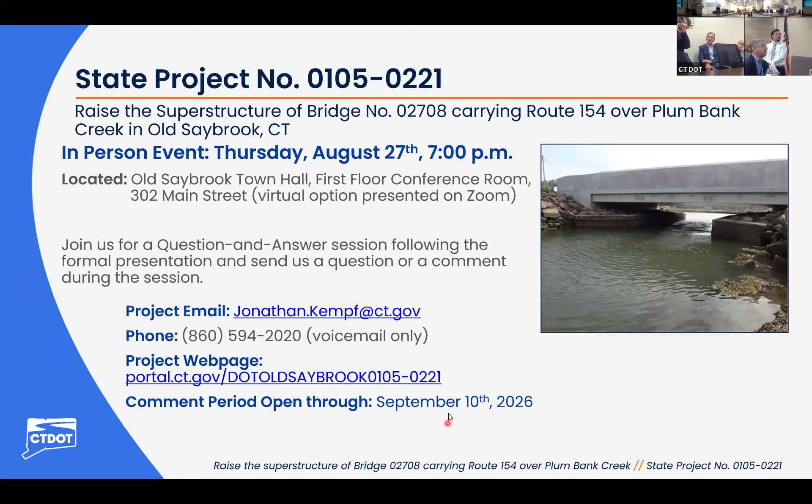I'll give a brief agenda. We have about a 15-20 minute presentation we'll go through. First I'll introduce the project team, then we'll go through our presentation of the bridge, an overview of the site, the project background, the purpose and need, why we're back out here so soon. We'll go to the proposed design and construction, discuss traffic considerations, construction impacts and schedule, and then we will open the floor to a live question and answer session.

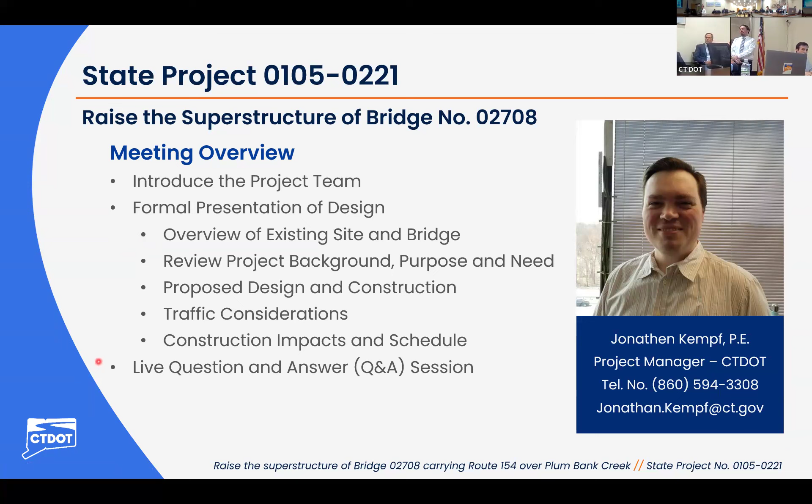As far as the question and answer session after our presentation, we will open the floor up both for people on Zoom and in attendance. We ask that you please give us your questions, comments, and concerns regarding this project, and then also for the next 2 weeks. If you're like me, you drive off and think of something later, oh shoot, I wish I asked that. There are a few different ways to contact us, and we'll keep this question and answer session open for another 2 weeks.

My email is up there, jonathan.kemp@ct.gov. You can also reach us by phone at 860-594-2020, that is a voicemail. If you leave a voicemail, please leave the reference of project 105-221. We will come back to this slide at the end in case anyone wants to take a picture of it for reference. Also, our project website has all the information laid out.

For our project team, with us today is Derek Lazard, he's our division chief of bridges. Andy Cardinale is our principal engineer with State Bridge Design. I'm the project manager, and after I present, Greg Lazard will go through, he is our project engineer. And then Greg DeArmond is our design engineer, he will also speak regarding the project.

A little information on Title VI, your civil rights. All this information more thoroughly is up on the website if you'd like to read through it, but the main point is no person shall, on the basis of race, color, or national origin, be excluded from participation or subject to discrimination in the development of this project. Also on the website we have a post-meeting survey, as well as some Title VI information. Also, on our YouTube channel, will be a copy of this presentation, so you can watch back if you'd like to see any details or something you may have missed.

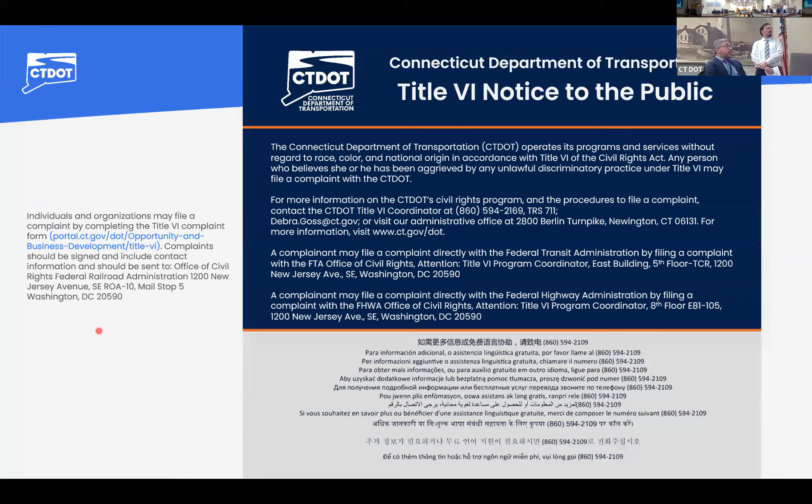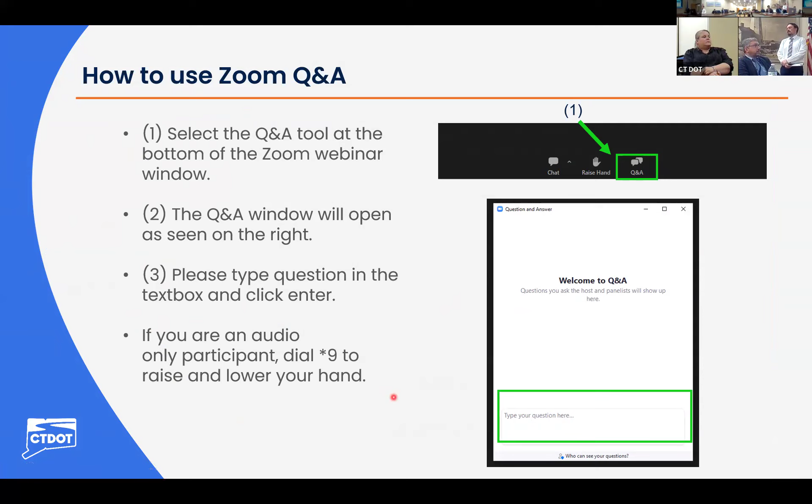Thank you, John. Good evening everyone, thank you for joining us tonight. First, I'm going to recap the project location and give some information about the current bridge. Then we'll go over the project background, what happened and why we're here today. Eventually we'll cover the proposal details, and thereafter we'll go to the Q&A session.

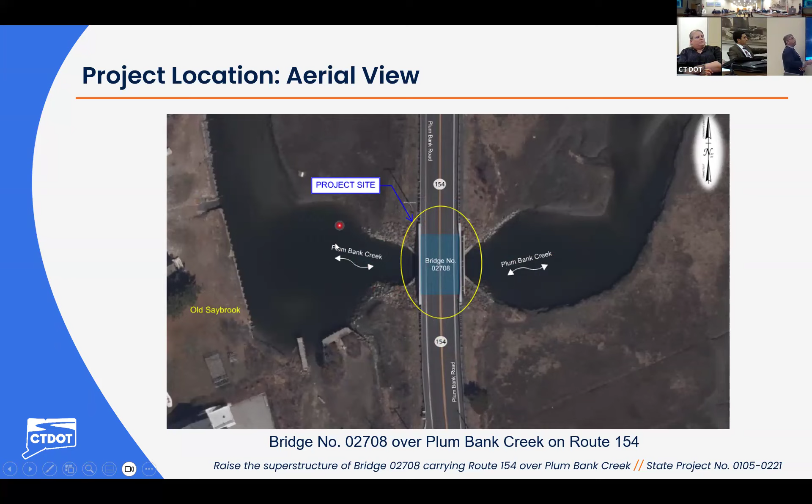Here is a closer view. What's encircled here is bridge 2708, it's a zoomed bird's eye view. On the right-hand side is the marshland, and on the left-hand side is the ocean, and that's Plum Bank Creek.

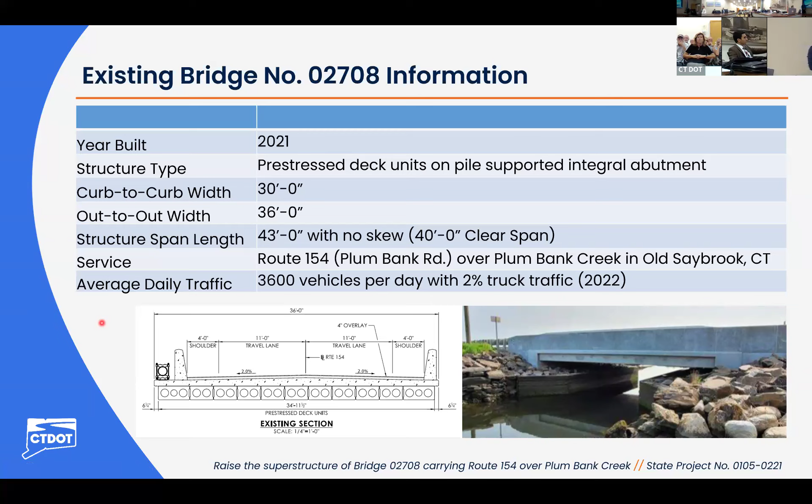The current bridge is made out of pre-stressed deck units forming integral abutment structures supported on piles. The curb width of the current bridge is 30 feet, and out-to-out is 36 feet. The structural span length is 43 feet, has no skew, and the clear span from the base of the abutment or base of support is 40 feet. The average daily traffic is 3,600 vehicles per day, 2% of which is truck traffic, based on the traffic count in 2022.

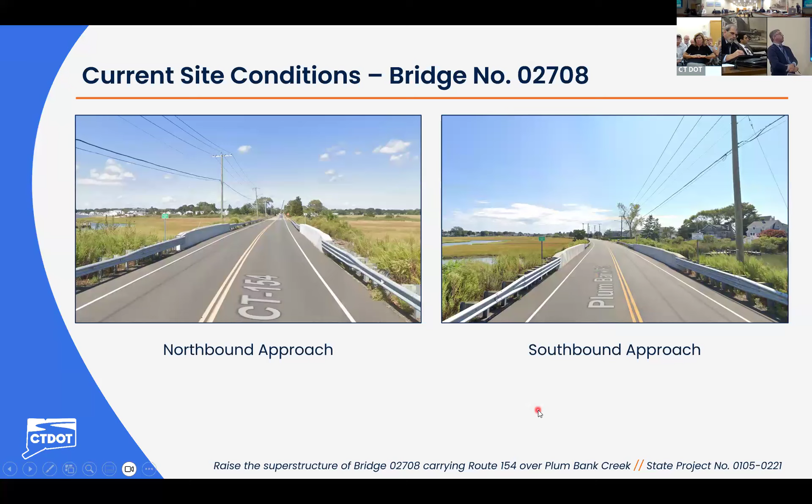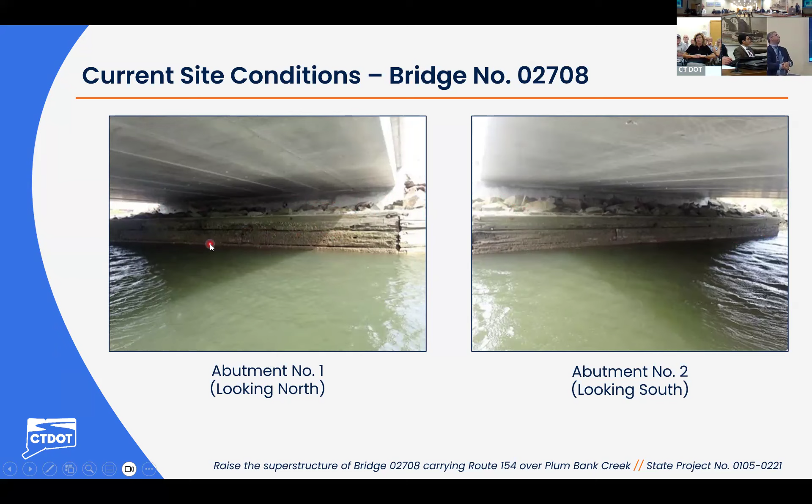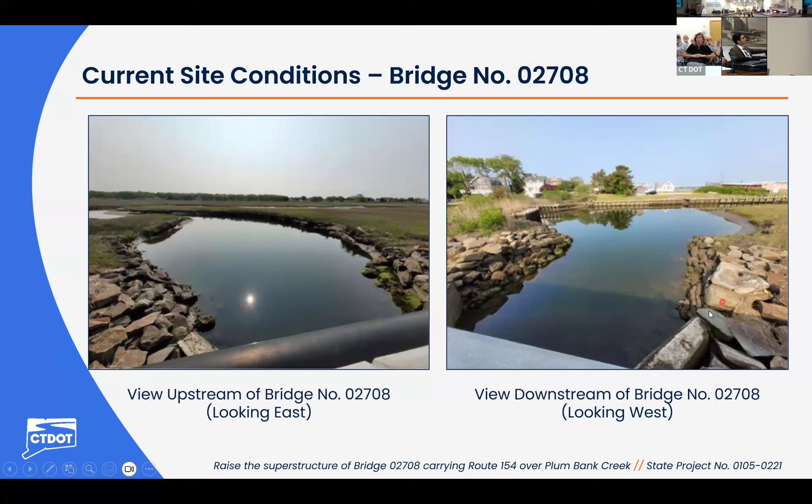Now some information about the project background - what design challenges or site constraints we dealt with when building the bridge back in 2021. The major thing was the existing abutments of the original bridge, built in the early 1900s. We kept the existing abutments in place because of a scouring event in the early 1900s - they came in and built concrete struts within the channel, abutment to abutment.

In order not to interrupt that, since it's a scour-prone site, we decided to build the proposed abutments behind the existing abutments, which resulted in increasing the span length of the bridge from support to support. We had to make the superstructure deeper, about 12 inches deeper than the original one, so we maintained the roadway elevation as close to existing as possible.

So what happened was that caused lowering of the low chord of the structure. So when you make that decision, we have to work around these design constraints.

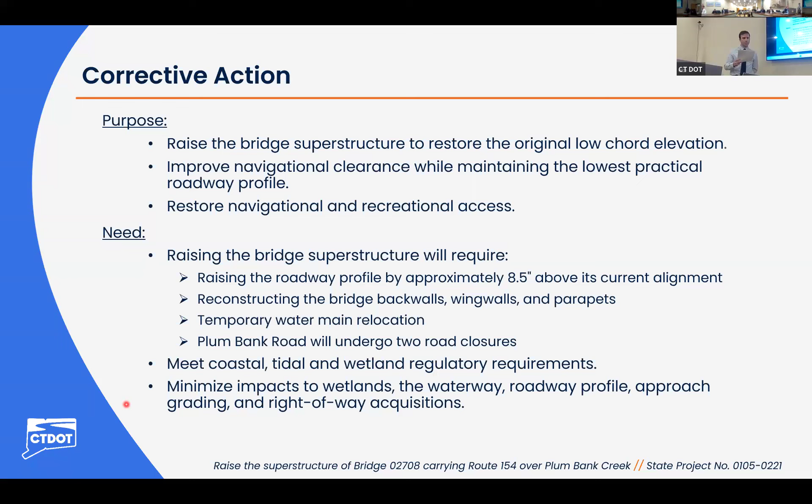shorter closure to relocate the water main and a longer closure to enable construction. The project is needed to meet the coastal and tidal wetland regulatory requirements, as Raymond discussed earlier. We're also needing to minimize impacts to wetlands, waterway, roadway, and the approach grading, as well as right-of-way acquisitions.

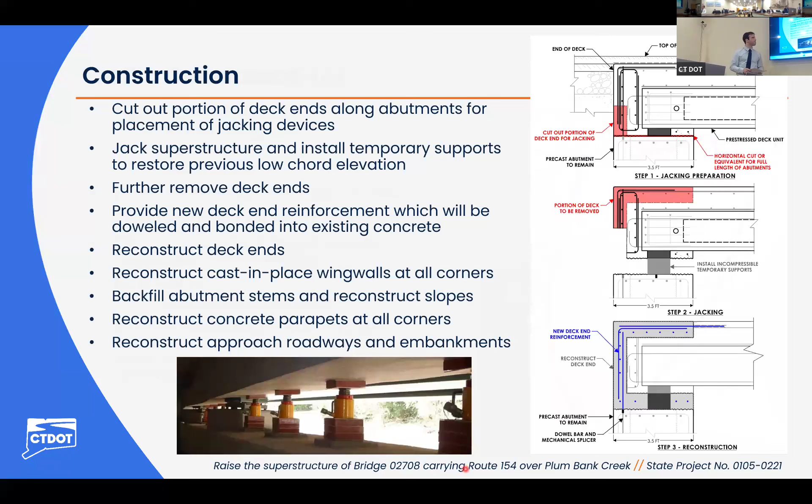Next, many of you may already be familiar with this, but we want to present a traffic detour being proposed by the department. The detour route is the same that was utilized for the 2021 project. Construction would be enabled by full road closure and detour, and Route 154 would be fully closed from Harvey's Beach driveway in the north to Tom's Road in the south.

Access to residences will still be available from either side of the project. The signed detour will take approximately 8 minutes and be about 4 miles in length, and the detour route will include Old Boston Post Road, Main Street, as well as Maple Avenue.

The road closure and detour is expected to take approximately 8 weeks, and the closure will occur outside of beach season, between Labor Day and Memorial Day. The average daily traffic here is about 3,600 vehicles a day, and there will be a shorter secondary closure that may be needed to temporarily relocate the attached water main.

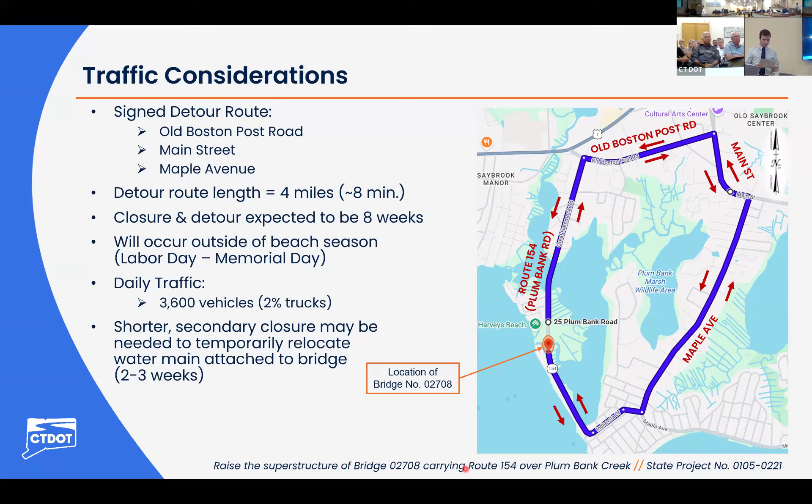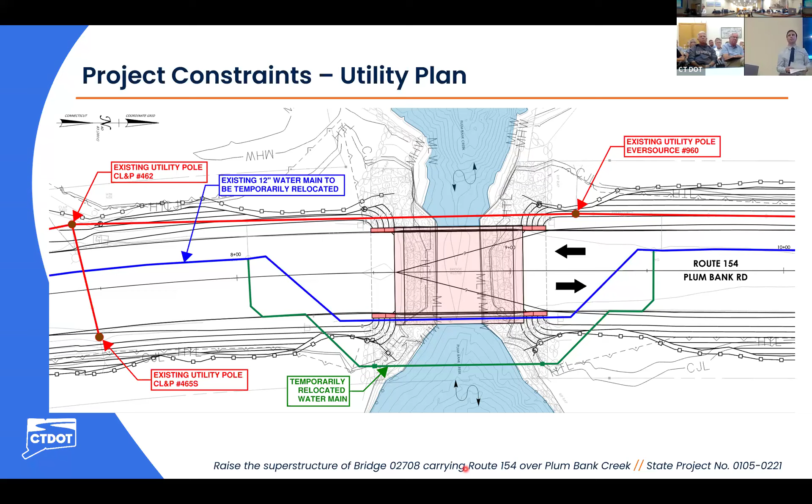We're going to review some various environmental impacts to consider. The project is located right here on the coast within FEMA flood hazard zone VE. Impacts to tidal wetlands delineated on both sides of Route 154 are also anticipated, especially along the approaching roadway slopes, to support the higher roadway.

The proposed bridge improvement does restore the original low chord elevation and will ensure navigational and recreational access from Plum Bank Creek. This enables compliance with coastal statutes and tidal wetland regulations. Construction will occur primarily on the bridge superstructure rather than in the water channel, limiting construction activities in the waterways. The proposed construction will maintain the current state of fish passage underneath.

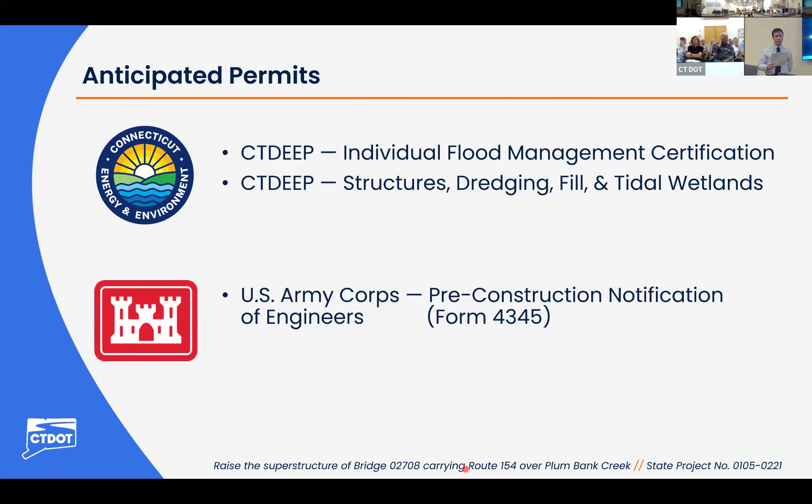Just want to review some anticipated permits with you all. On the state level from CTDEEP, we'll need to acquire an individual flood management certification, as well as permitting for structures, dredging, fill, and tidal wetlands. Federally, pre-construction notification will be needed from the U.S. Army Corps of Engineers.

Additionally, we want to review an overview of the project schedule and costs. Construction is anticipated to begin in the spring of 2028. Unconfined in-water work is restricted to the period between June 1st and September 30th. Final design plans are anticipated by the end of 2027. The construction duration for the project is expected to be one season.

Road closure and primary construction will occur outside of the prime beach season, after Labor Day in the fall. A shorter road closure will occur 2 to 3 weeks before Memorial Day during the spring of 2028, expected to be needed in order to temporarily relocate the water main. The project is estimated to cost approximately $3.4 million, utilizing 100% state funds.

We also want to note that the schedule is subject to the availability of funding, right-of-way acquisitions if necessary, and permitting.

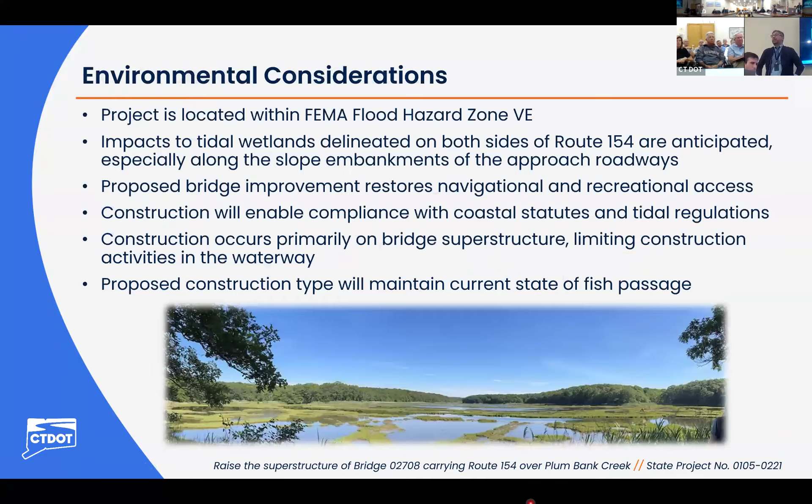So again, as John mentioned, one of the constraints is the structural capacity. The second constraint is that if you want to raise it much higher, that's going to cause a lot of right-of-way issues, and regrading the whole site would increase environmental impact to the tidal wetlands. It's just a matter of fact that Back River, all the way up to the marshland, is not going to be accessible in the future. It's not much better than it is now.

Sorry, but I think he was first. Okay, I apologize, I'll get back to you.

Yes sir, my question is: first of all, what happened that the bridge has to be raised, when both bridges were put in, they were supposed to be put in at the right height? Why is this bridge lower? Is it a construction problem in the beginning, that somebody messed up? So why do you have to spend this money? We're spending all this money over again to build a bridge that you built two years ago, that should be at the right height. Why is it lower? And again, if you're going to raise it, why can't we raise it a little higher so you can get a paddle board under there?

And my other question is this: in the beginning, we had a problem with the tide going up, right? So it was destroying the land, going out towards the ocean — the docks over there and everything, all the land that was up to the dock is now gone. So you were supposed to widen that bridge to make the tide not so forceful, but you never took out the old embankment, so that water pressure hasn't changed at all. So why wouldn't that be taken out and made wider, so when you have the high tide that's up now and the low tide, there'll be less pressure going out?

So let me answer your second and third question — we did just discuss this. Again, we had constraints to raising it: number one, the structural capacity right now, because we can't do that. And if we were able to raise it, we'd have to build a bigger bridge.

But again, that brings a lot of constraints. What caused it in the beginning? As to why it was too low — this structure is considerably longer than the first one. The first one was 12 to 15 feet, and this one's now 36 feet, so we about tripled it in length. So you have a deeper section now, because it's a longer structure, we needed a deeper section to get the structural capacity out of it. So rather than raise the roadway profile — by keeping it as is, hydraulically it was adequate, and structurally it was adequate.

There was an oversight as far as this being navigable water — that was just missed. That was brought up after it was constructed, that this one was lower than the existing one. We went back, looked at it, and saw yes, this is lower than it should be, and this is the project that was initiated to address it. So that's the background of how we got there, and the kind of engineering decision behind it.

So it checked off a lot of the boxes, but it missed one, and this one is a state statute regarding regulations. So are you going to go up 8.5 inches from where it is now? Correct, 8.5 inches, which would match the opening you had before. Correct, and you couldn't go any higher.

Well, if the current structure has capacity, as we keep raising it, there will be a lot of forces, the earth pressure, acting on it. So the bridge wasn't built for that, that wasn't the initial intention. Your last question about making it bigger, we just discussed that a couple weeks ago with our hydraulic engineers. That wouldn't change the outcome.

So what governs the water level here is the mean high water on the ocean side, it's the tide. That's what governs it, so this opening does not govern the level of water. Yeah, but I understand it, but...

The reason they were widening it was, the big reason, was because of that pressure going out. They wanted to relieve the pressure so it wouldn't be so strong. But that pressure hasn't changed, even though it's up higher, when it comes down it's running through that little path. You want to try to see what it's doing, check the embankments, check what that's doing. You haven't treated that at all. I thought that was one thing you were going to do, widen it so there'd be less force of water going out, causing damage to the marsh and damage to the other side. That's where I thought was happening, and it's not happening.

So, again, per regulations, this is what the coastal statute says: in no case decrease coastal access and recreational opportunities.

Okay, I realize that, but what I'm saying is, do they investigate as far as are the water levels higher? Do they determine have they become higher in 100 years? Or do they just assume it's the same? Is there an entity that determines the bridge height based on current facts or stuff that was 100 years ago, as Mr. Fortuna asked? Is there a state entity that does that?

So we have an environmental expert here. My name's Amanda Saul. I'm the supervising planner of DOT's environmental permitting unit.

So the way the state statutes are written, it doesn't directly address sea level rise in that way. It just makes reference to the existing conditions that are there today. So there are portions of the coastal management regulations that talk about resiliency, and as a state agency we're to address resiliency. In this case, as Raymond indicated, at those record storm events, the whole roadway, the whole bridge goes underwater. So there's nothing we can do to get the bridge high enough to be out of that flooding condition, but the design that's built is resilient to the forces of those flood flows.

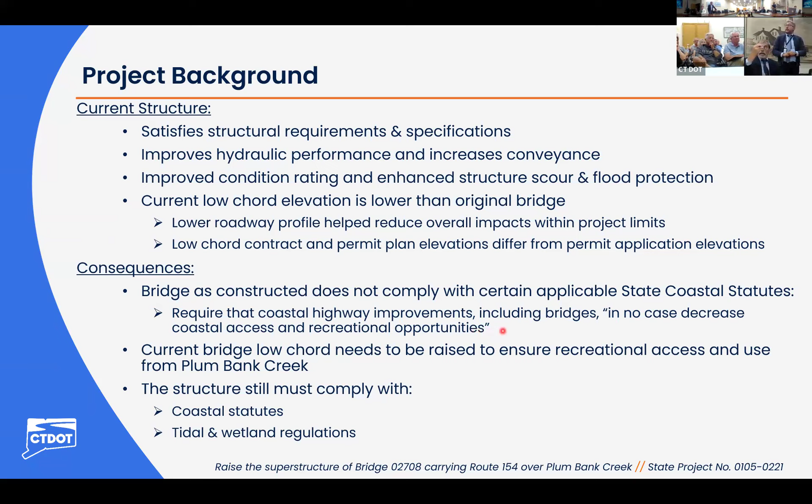Are you aware of any, Andy, right now? No, other than, based on what Ray is mentioning, you have the storm surge event, which is 5 to 9 feet? Correct, 5 to 9 feet basically above the structure. So obviously putting a structure at that point and what impact that's going to have environmentally, rights of way and everything else associated with that is going to be very, very extensive.

So there's a balance, right? Just in conclusion, because I don't want to repeat myself, it seems to me that it's elementary for planning that our statute should take into account these factors. We shouldn't be spending all this money to make what looks to be a minute change in the bridge, an expense and inconvenience to people around. And secondly, what is ultimately going to be needed there? Because why spend all this money on these little improvements if we really need a big improvement? Now I know that's a big public policy issue, it goes way beyond Old Saybrook, the whole coastline.

It's not your issue. You're technically creating a bridge that meets all the requirements and you do what you have to do. I'm really looking over on that side.

So just quickly, I'm actually running to another meeting that I have to hop on virtually with the Gateway Commission. Number two, I wanted to make sure folks online and folks in the room know our chief of police is here. If there's any traffic or safety issues with regard to this project, I'm sure Chief Onofrio will address them. Thirdly, to your comment, when the day comes that we're 8 to 12 inches higher, I think we all are going to have a different discussion about where we're living along the shoreline too, because some folks may not be able to live in their current houses. That's the depressing comment I'm going to leave you with tonight as I run to somewhere else.

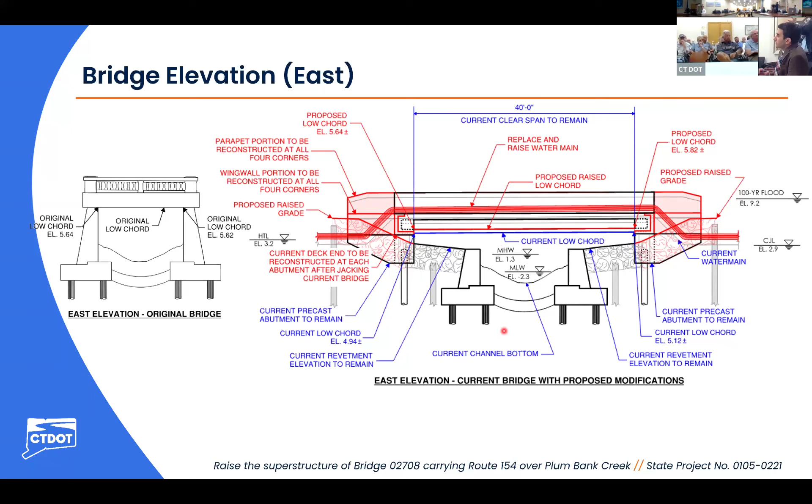Thank you. One other thing, why bridging, they have to bring all the roads to it. You're absolutely correct, I mean why would you ever go over a bridge you can't get to?

So it will, when we raise it up, it will be tied back in gradually. Yeah, so as you raise the roadway up, you tie it as it goes back into the road, so it's not just all there. We do go a couple hundred feet either side of the bridge to gradually transition. But it is kind of, when we're in the bridge road, we do what are considered spot improvements, so we're very much at the bridge site and adjacent to it. And so we try to minimize that footprint because, as we look at this, scope creep is very, very real with us.

And for that first project, this bridge was in poor condition. Structurally it was concerning, as you know, 90+ years old, but the goal was to replace it and do whatever we can in the surrounding area, because as you go up and down the road there's always more you can do. So we try to minimize the impacts to keep the costs down and also stay within our specialty, because this is being run by structural engineers. We do work with hydraulic engineers and highway engineers, but our main priority there was the bridge was in poor condition and that's what we wanted to address.

So why don't we, in 10 years, when we have to raise the road, then raise the bridge? Why do it now for $3.4 million? Well, and that's why we did work with hydraulic engineers, we did the hydraulic analysis. It's hydraulically better, I know it doesn't achieve everything, but I think you build it better now. The opening is considerably larger than it previously was. Now, during a storm event, it goes actually above the existing abutments that were left, so you have more conveyance.

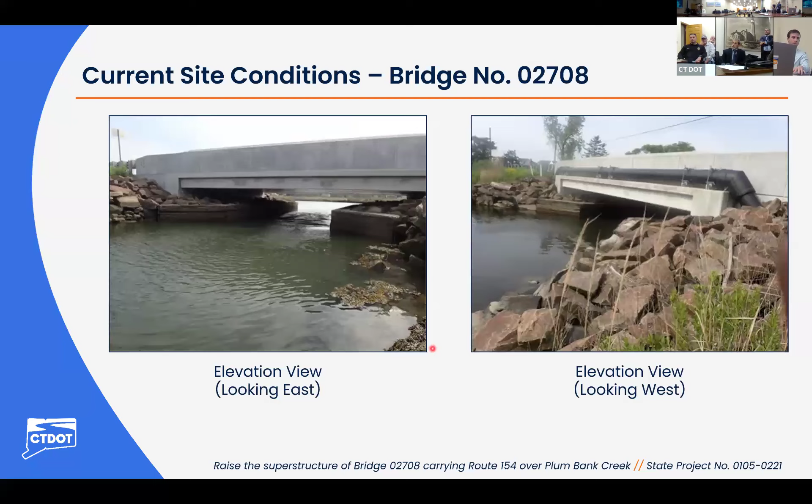Just to add, in these bridge projects, do they assess any proposals down the road to actually elevate that road? Because anyone here can tell you, even at an abnormally high tide, there's already salt water over parts of that road. So are we doing an in-between step that would eventually mean that whole road would have to be elevated?

Or are we spending, I believe the gentleman said it correctly, three point something million for a temporary elevation that would eventually have to be incorporated into, I'm assuming, the state's responsibility for that whole road.

Correct, that's the state. And there's numerous times I drive over there and there's salt water over the road, I'm sure anybody here could confirm that. So do they consider that before we run out and spend three or four million dollars? Ten years from now, will they have to elevate the road and do something with the bridges? Or does anybody even incorporate that into the plan?

Right now, the whole reason we're here is really to address that. We have to comply with that statute, and that's the direction we've been given, is to comply with that. We can certainly take your comment back and bring that forward again.

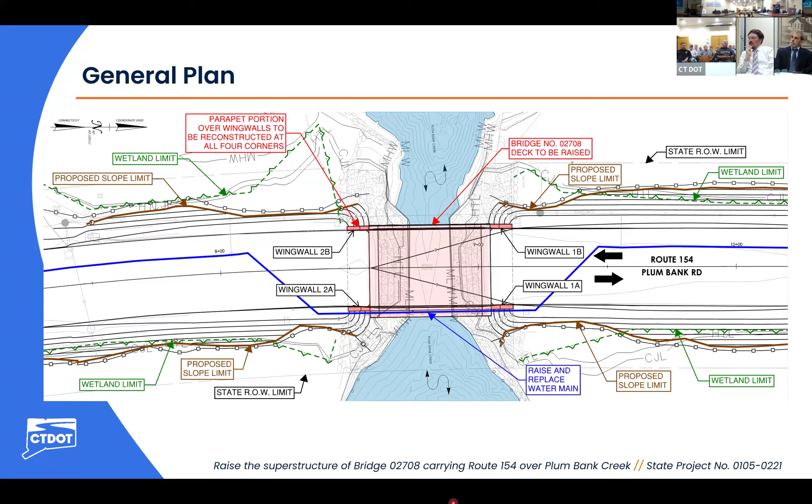Well, I appreciate that, thank you for the answer. But right now, that's our target, to address the access issue. So right now this is basically an issue of access, correct, the recreation, rather than total elevation down the road. Correct. Thank you, well let's be clear there.

Where's the question? Oh yeah, but somebody raised their hand online, I just want to go back online for a second. I will get back to you, sir, okay? It's John Oven.

I've lived on the marsh, or near the marsh, since the early 90s. And I just want to disagree with a couple of the comments made tonight from the audience, that this bridge was always at least 4 to 5 inches higher in clearance than the Plum Bank, the Back River Bridge. And if you're trying to get in or out with a kayak at high tide, that 4 or 5 inches makes a huge difference in being able to get in and out. I personally know that just in the last couple of years, there have been 2 kayakers trying to get through the Back River Bridge that capsized because they had to get down so low to get in or out, and got swept up against the docks on the other side.

That whole area is a mess, flooding all the time. So not just this issue, there's flooding issues. Is anybody looking at flooding? Is there anyone here that's looking at the flooding issue? No one here. We're all the bridge folks, right? Okay, so we're focused on the bridges. I can't speak to anything from the department side if they're looking at a corridor.

That should be discussion, just because, like you said, in a few years it's gonna be worse and worse. You're gonna go for 8 inches now, which is great, but the flooding is worse and worse. The creek is so high now, it never was that high. It comes over the road almost once a month at least, and many times you cannot drive through there, many times. So someone should be looking at flooding, and I don't know, does anybody here know who is looking at flooding?

Well, we can go back to the department and see if there's any studies going on. It's definitely, we're all aware along the coastline, in the state of Connecticut, of the issues of flooding.

Understand too, if we were to raise this state route, there's a lot of right-of-way impacts. Think of all the homes and driveways leading up to that road. It would be a very significant project with a lot of impacts affecting a lot of people, so that would be a process in itself just to work through.

We can start now. Understood, it's getting worse every... Understood, so we'll bring that back and see if there's anything happening, and we can definitely address those comments.

Again, this meeting here is to document everybody's comments, right? That's what we're here to do. We are bound by the statutes, we're bound to fix this issue. We're listening to your comments, and that's what we're going to bring back. We're documenting them, and we will work with Connecticut DEEP as one of the regulators with the permits, and we'll let them know what everybody's saying here.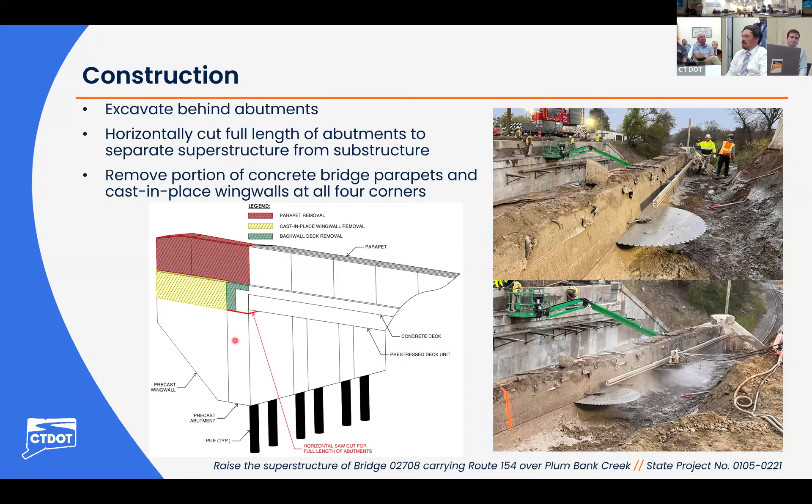There's - he was here, okay, let me go back. Can you clarify the Plum Bank Bridge structure, the height that's there? Is it the same height as the Great Hammock, the Back River Bridge? I mean, there are two identical built original bridges.

I don't know if the elevations are the same. I don't believe the original constructions were the same original elevations - I think this one was higher. So Plum Bank is higher? Yes, I think Plum Bank was always higher.

Traveled on that bridge - so the Great Hammock Bridge, from what I travel under it and what I travel, to me appears to be lower than Plum Bank, right? It's lower, that bridge, because I can boat underneath the Plum Bank but try to get under Great Hammock.

Just a question, that's all. Because I think you're gonna be back.

So this is the third bridge you're talking about? It's not Black River? Right, Back River. Oh, I'm sorry. Okay, gotcha.

Yes ma'am, they can't do one of the pre-built bridges to cut down the time. Those pre-made bridges are temporary, not permanent. We have those bridges at some locations in the state, but they're meant to be temporary. They stay for a couple of years and then we have to put the permanent one in, because of redundancy and inspection issues, they're not as redundant or resilient as concrete structures like this.

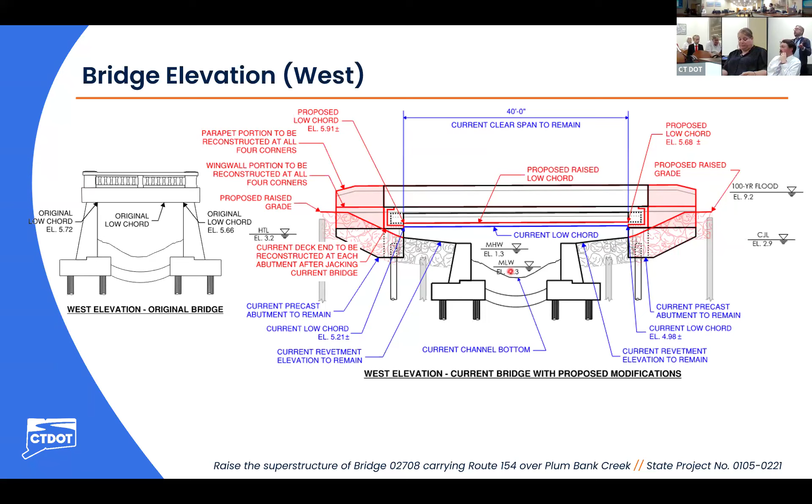I was born in Canada. We've been here for 40 years.